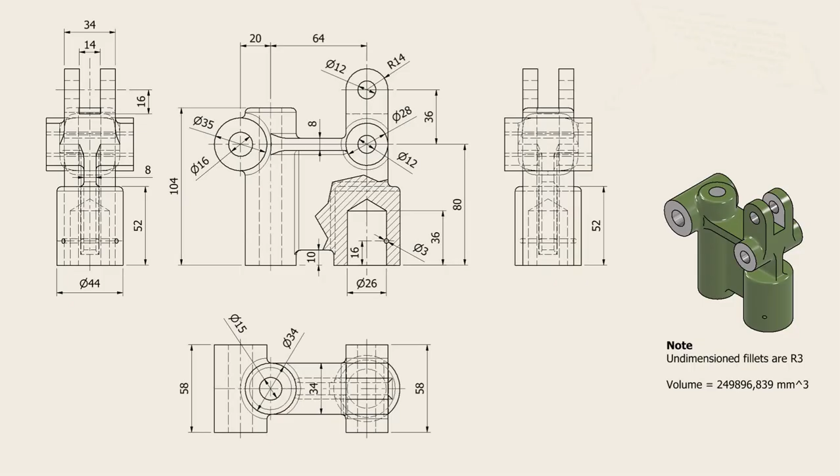Hi my friends, today we model this part with the name connecting piece. It is not so complicated. The drawing is here.

We start by creating these two circles, one of diameter 44, this one, and the other with diameter 34, at a distance of 64. One is 52 tall and the other is 104. Let's do this.

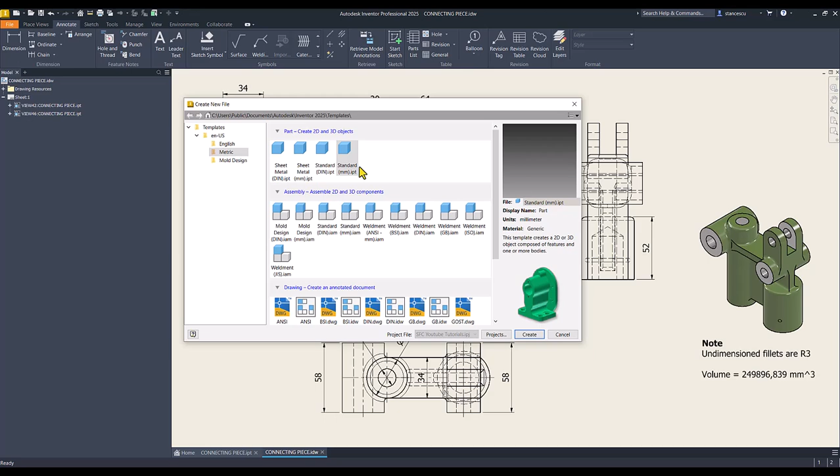New standard millimeters IPT, new sketch, this plane. I rotate the axis to have X to the right. Circle 44, circle 34 on the same horizontal, at a distance of 64.

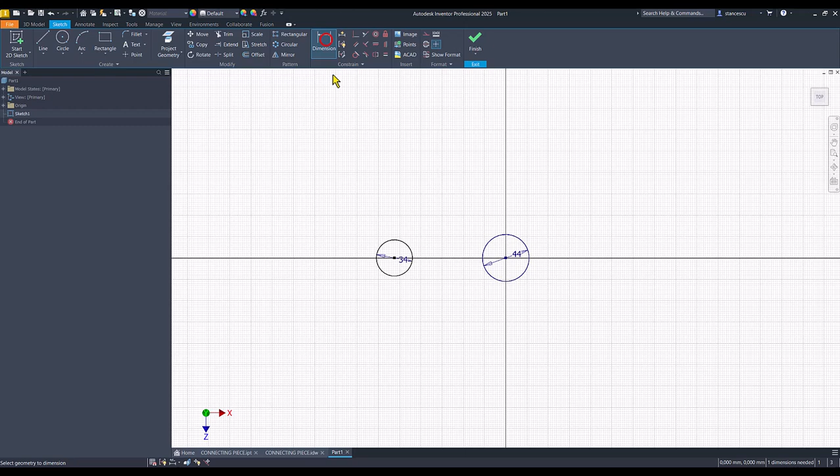Finish sketch, extrude 52 plus 104. Okay.

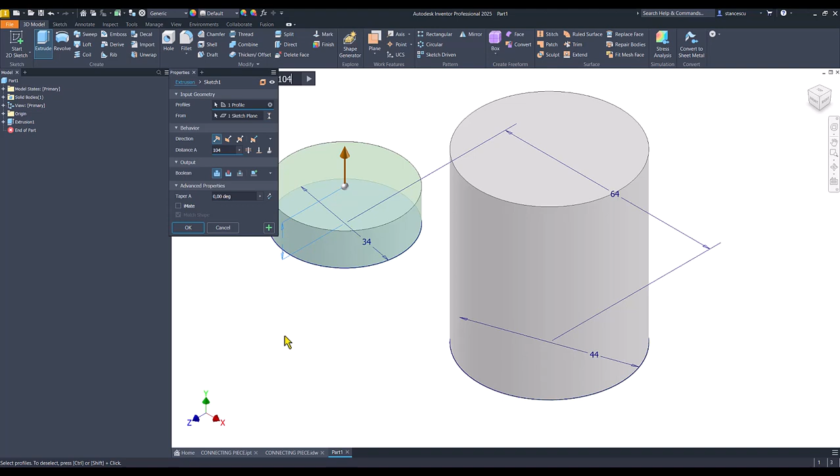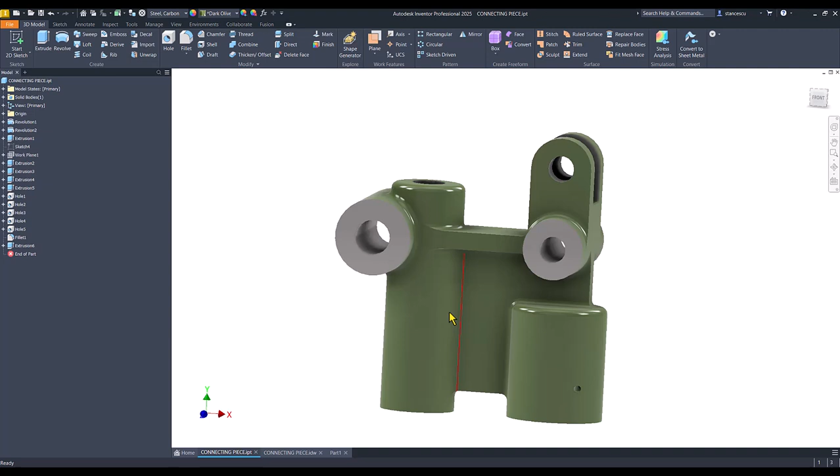Now I want to create this rib, which goes to here and it's tangent to this cylinder. So I create it to this level, mid of this other rib. More specific dimensions are 80. Note this 10, and the distance from this face, which is 14 millimeters from the center point. This is the center point, and I have to place this at 14 and the other on the axis of this cylinder. Let's do this.

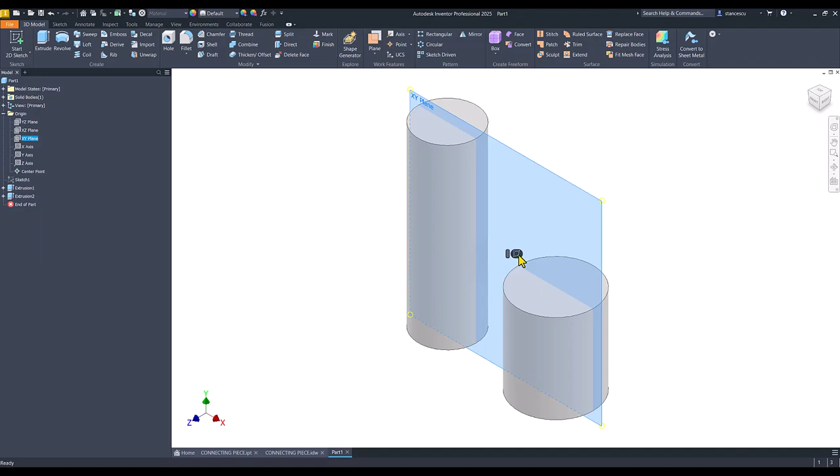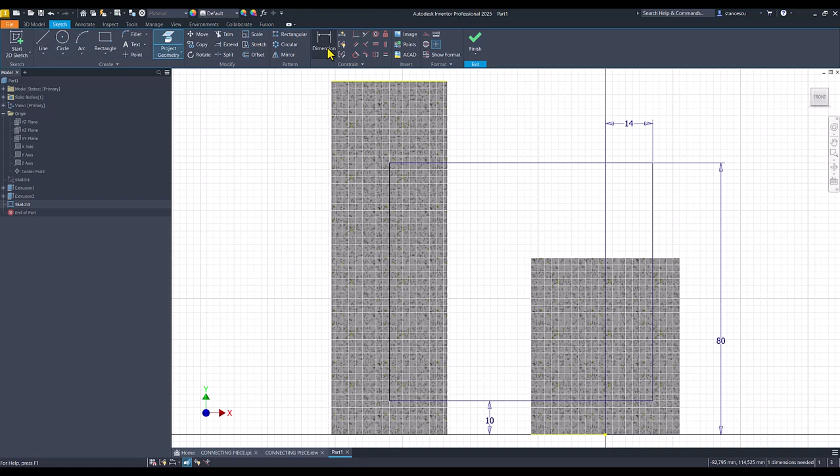We use the plane XY for a new sketch. F7, rectangle, somehow this is placed at 80 millimeters from the bottom. This is 14. This is 10, and I project this face to have the possibility to make coincident these two, line and point.

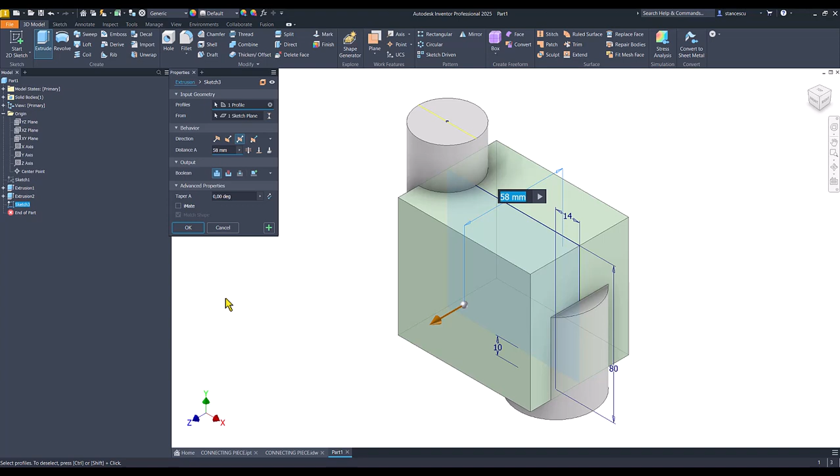Fully constrained sketch. Let me see what is the thickness. Thickness is 8. I apply extrude, symmetrical, 8. Okay.

Now there is another rib, and I start with it from here, from this axis to the left. Dimensions 8 on 34.

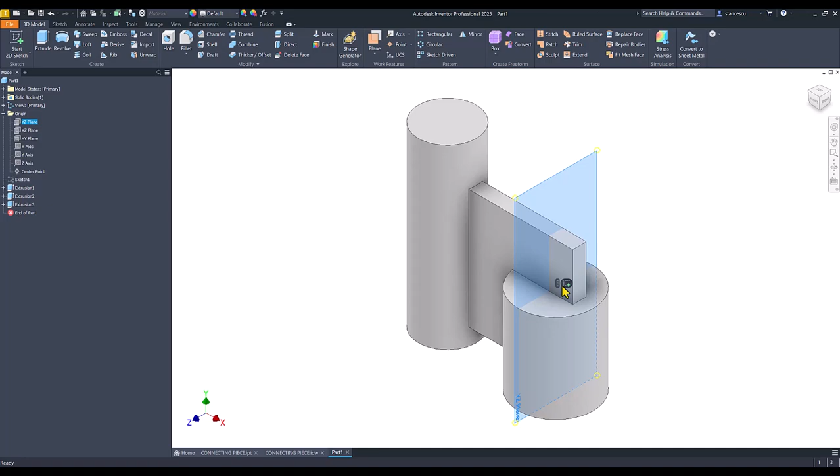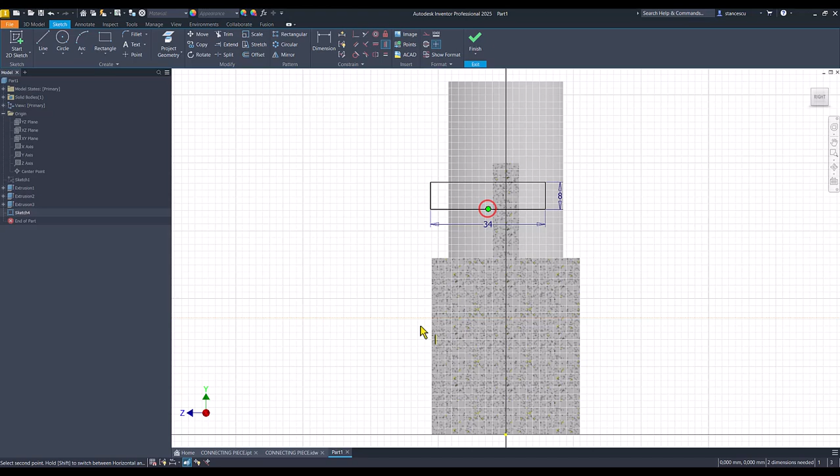I use this plane and a rectangle of 8 tab 34. F7, I place the midpoint of this side on the same vertical, Control Z, on the same horizontal with the center point.

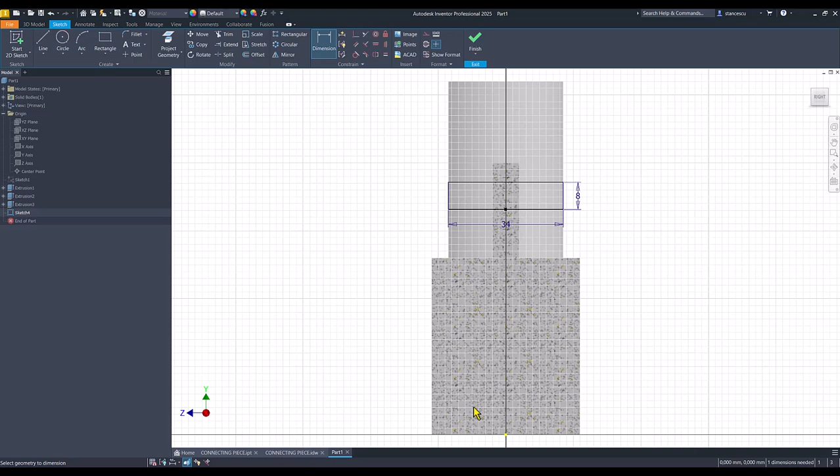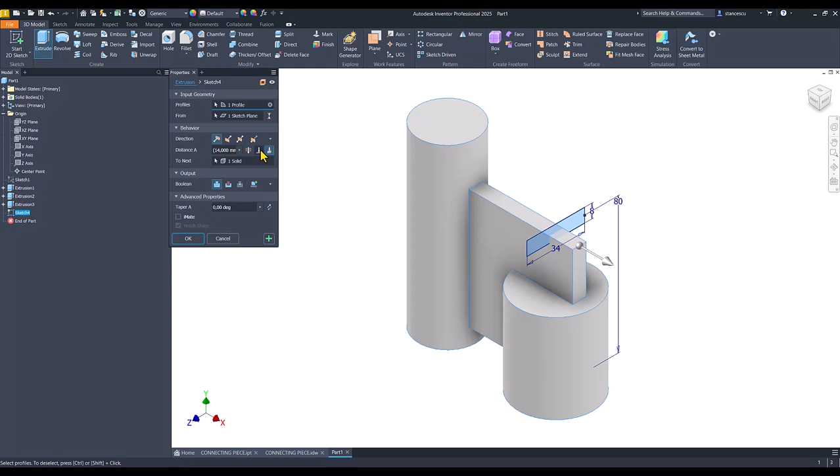Placed at a distance of 80 here, 80. Finish sketch, extrude to the part, to the face, to this face. Okay.

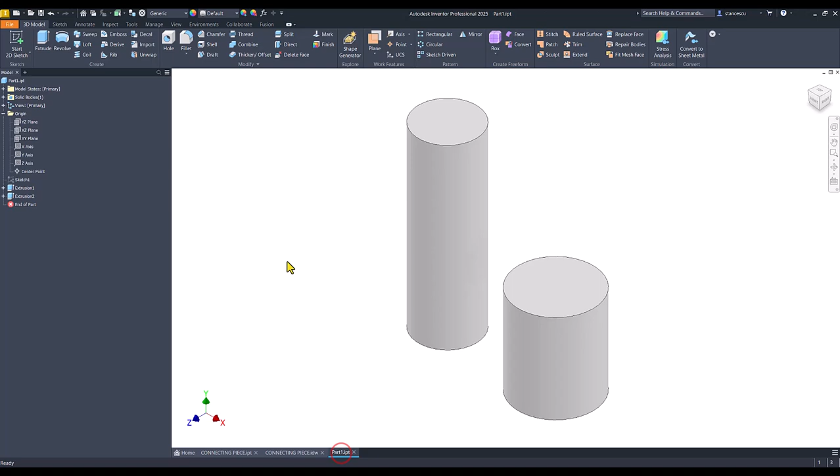We continue with these other two cylinders, diameter of 34 and 28, distance of 64 plus 20, on vertical 80, and this is the axis with the center point, which is here. The two cylinders are the same length. Let's do this. We use this plane XY,

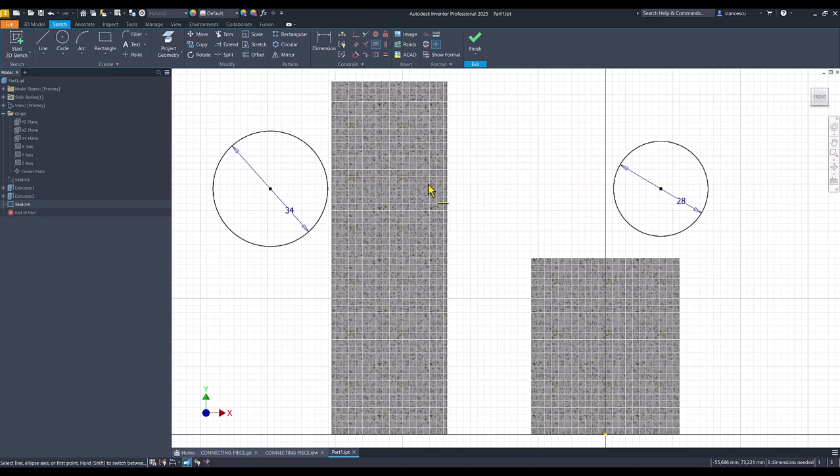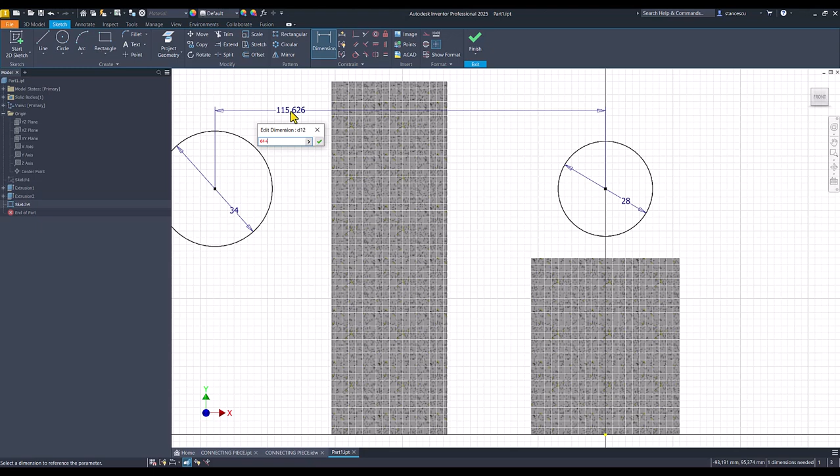F7, circle of 28, another circle of 34. They are placed on the same horizontal, and one of them is centered on the center point, and the other is placed at a distance of 64 plus 20, 64 plus 20. The distance on vertical is 80.

Finish sketch, extrude, 1, 2, on 58. Okay.

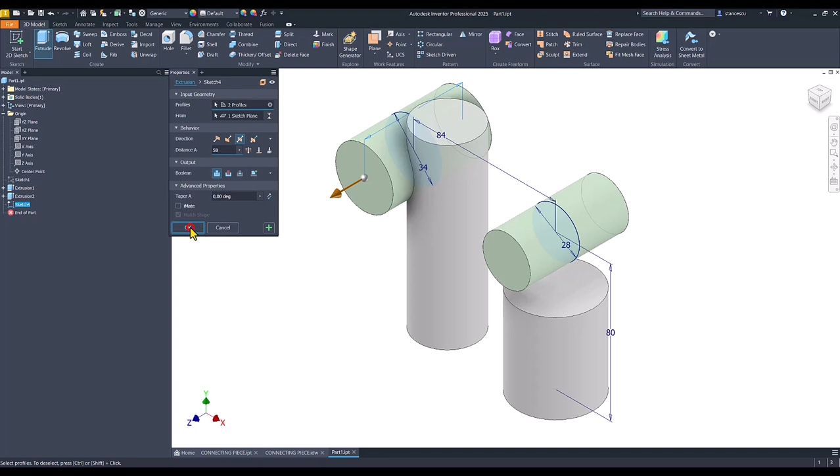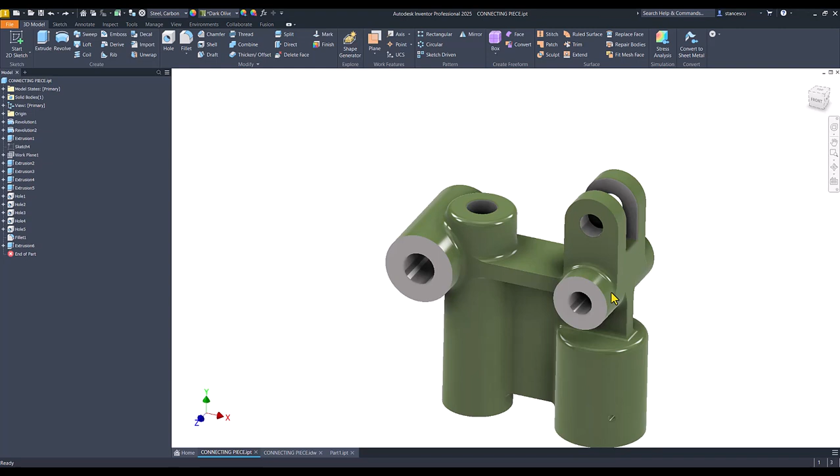We continue with this rib, this one, or this one, you see, this. We start from the mid of this face and ending to this cylinder. Dimensions are 34 on 8, placed on 80 millimeters from the bottom with the mid axis.

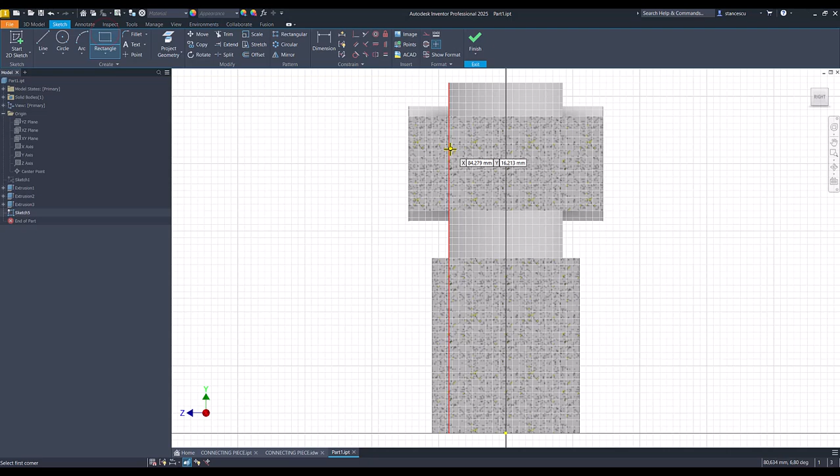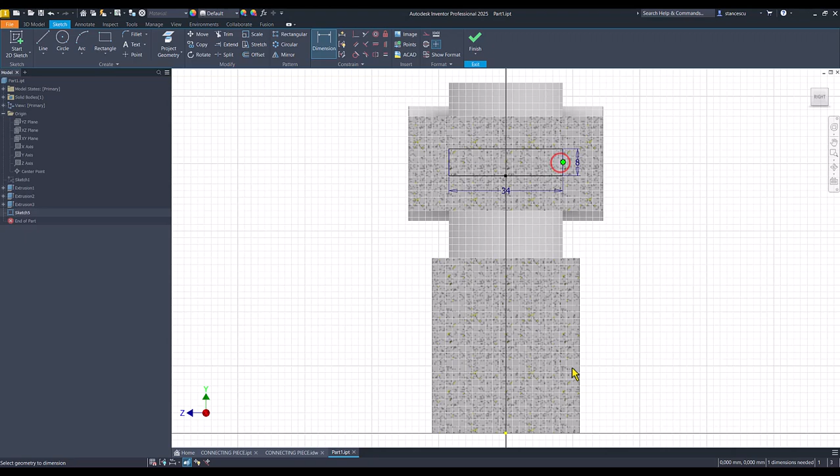Okay, the plane is this, F7, rectangle, 8 tab 34, then I place it on the same horizontal because this is vertical between these two points, and the distance of 80 from the bottom to here.

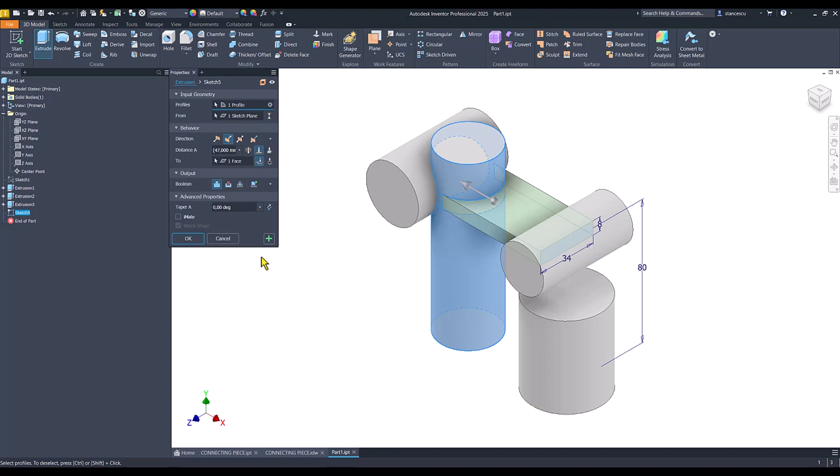80. Finish sketch, extrude to the other direction and ending to this cylinder. Okay.

The other rib is this one, and it connects the two vertical cylinders. Dimensions 10 millimeters here to 80 up, and it ends here tangent with this cylinder. Good.

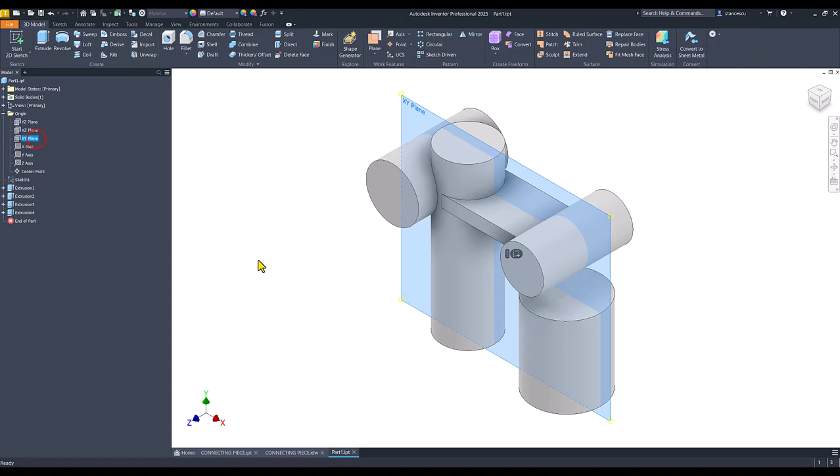XY plane, F7, rectangle, to this face and tangent to that circle.

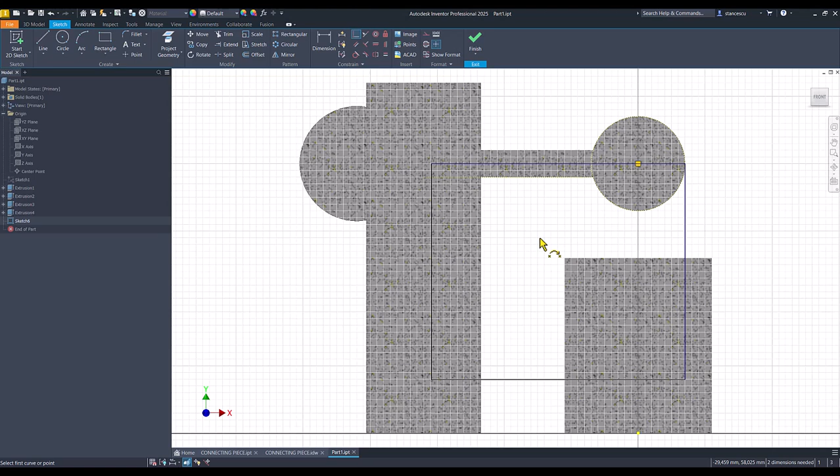I project this face, I project this cylinder, but I make them construction, and I apply tangent here, collinear here, now I place this line on this point, and this distance is 10.

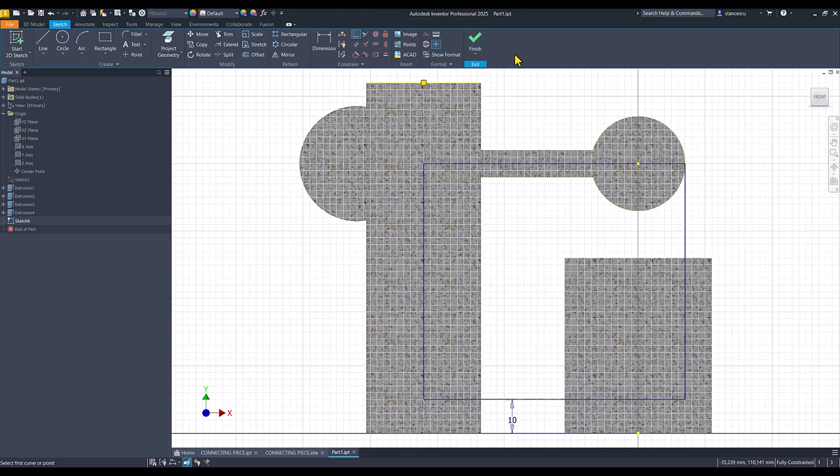I project this line to make coincident this line with this center. Yes, fully constrained sketch. Extrude, symmetrical 8.

Okay, you see here the thickness. Very good.

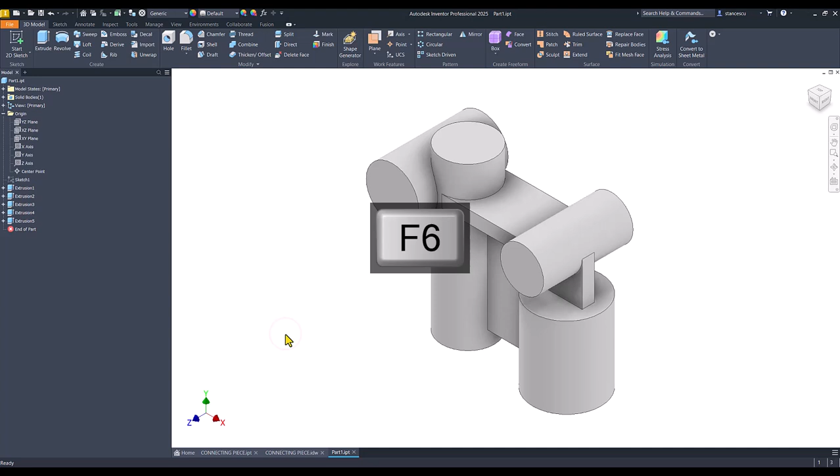Now we focus on this feature. Dimensions are here, 36, radius 14, starting from this 80. Let's do this.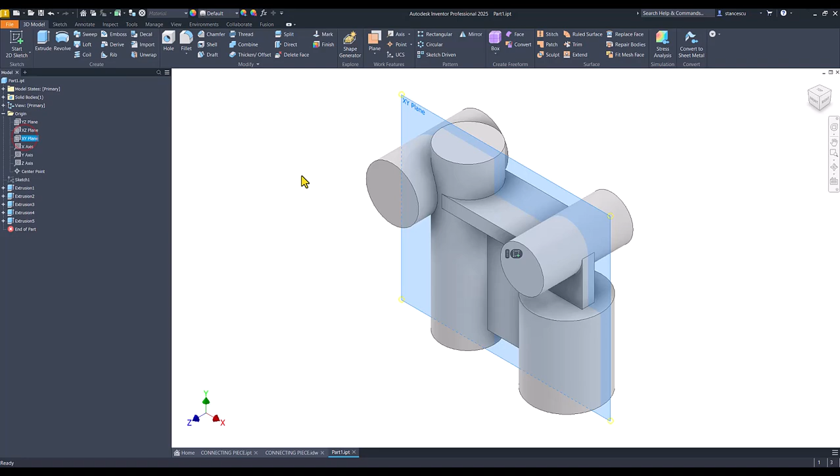The plane is XY, F7. We project this circle, but I select construction,

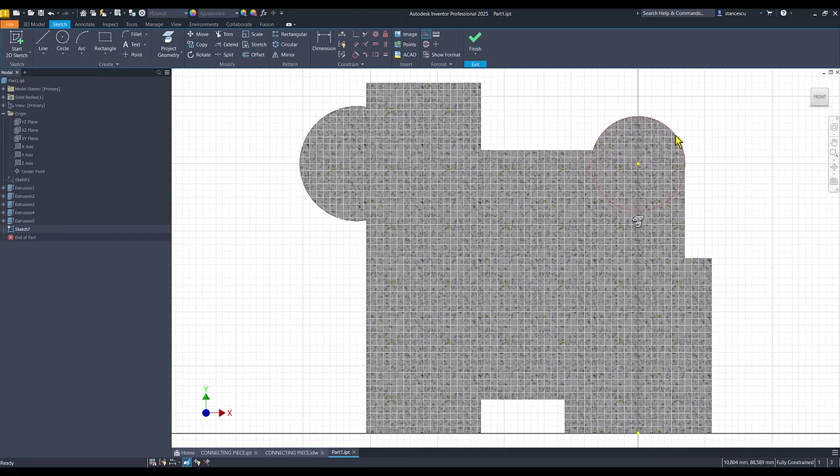then I draw a line from this end point to this horizontal end point, but this is not okay. No problem.

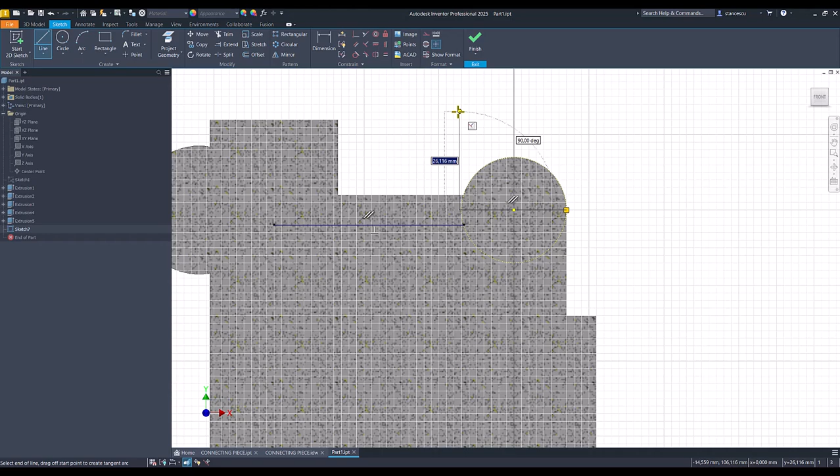I go here, click, press the left button and go here, close. Now I place this end point on the circle and I apply tangent here.

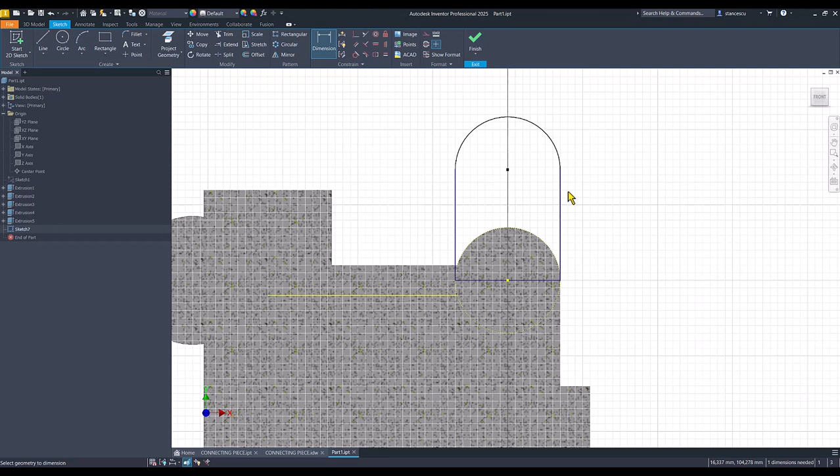Radius is already 14 because this circle is 28. I can accept or I don't accept. I don't accept. But the other dimension is important and necessary, 36.

Finish sketch. Now you see here the dimension 34, then a cut of 14 on 16. Extrude, symmetrical 34. Okay.

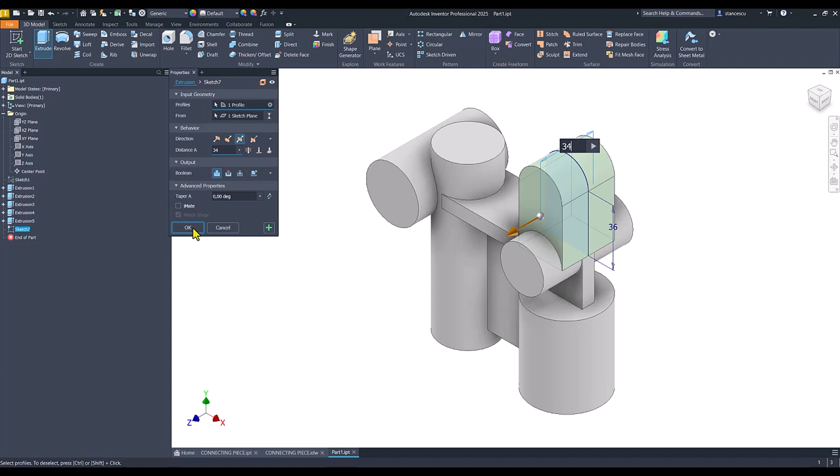Then I use the same plane, F7. I draw a line between these two, which has the dimension of 16 from the center, but this center is not projected. I project a circle, I apply dimension of 16.

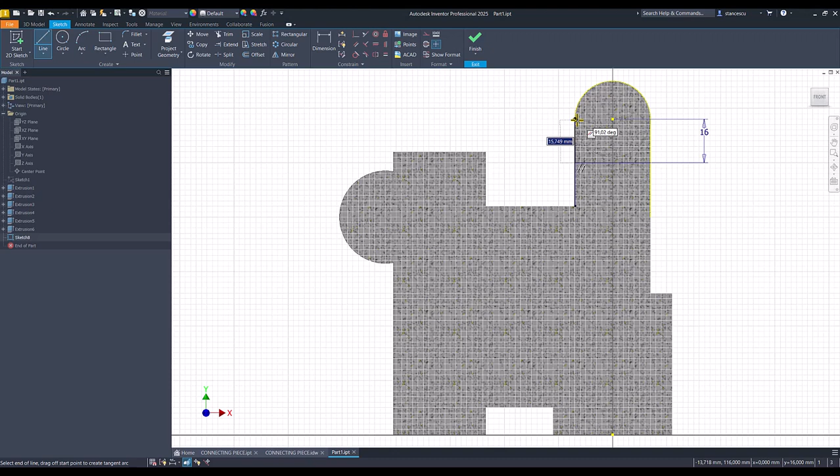And I draw two lines, one, restart, two, and now I apply extrude, symmetrical, with cut on 14. Okay.

Next, the holes. There are many holes. This is 16 and this is 12, as well as this one, 12, and they are through.

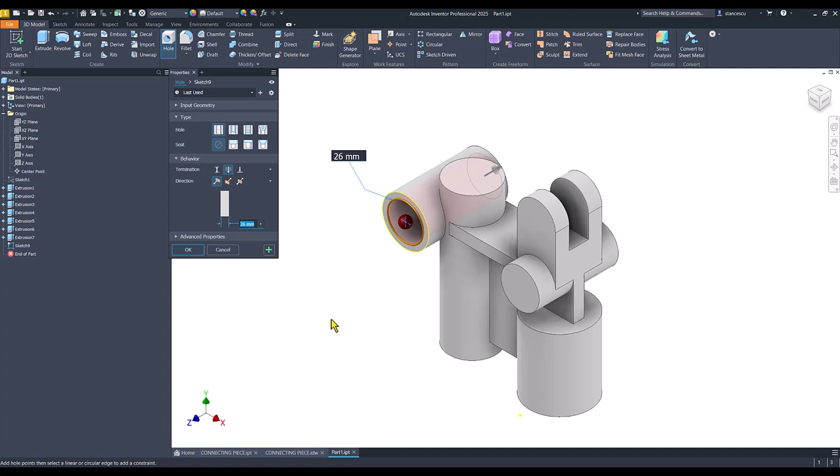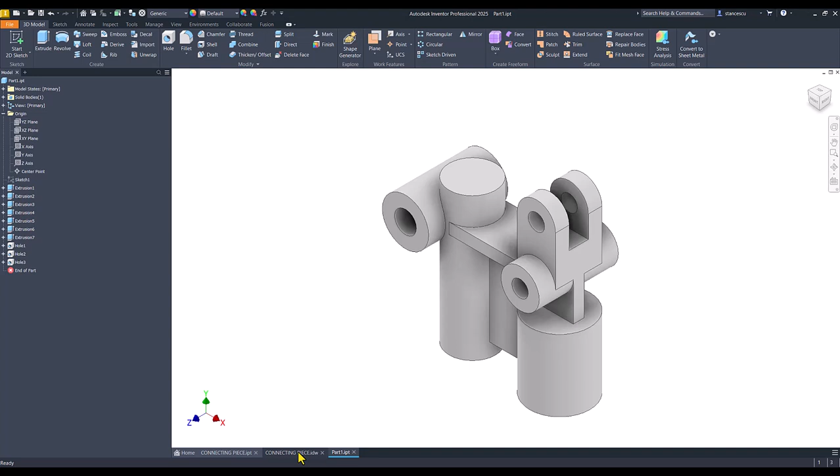Let's start with this hole, face, center, all the way through, and the dimension is 16, plus this face, this center, but the dimension is 12, plus this face, this center, and the dimension is also 12. Okay. Other through hole is this one with diameter of 15.

Hole, face, center, 15. Okay.

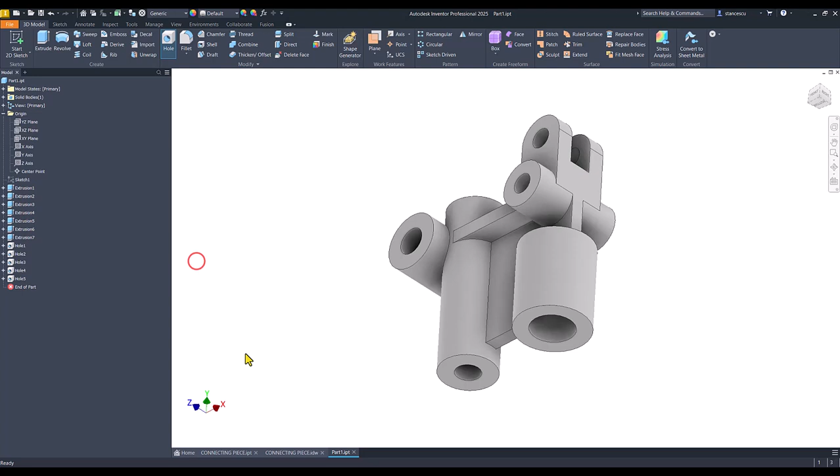The other one is this, 26 on a depth of 36. Hole, with end, from face and from center, of 26, on a depth of 36. Okay, you see that hole.

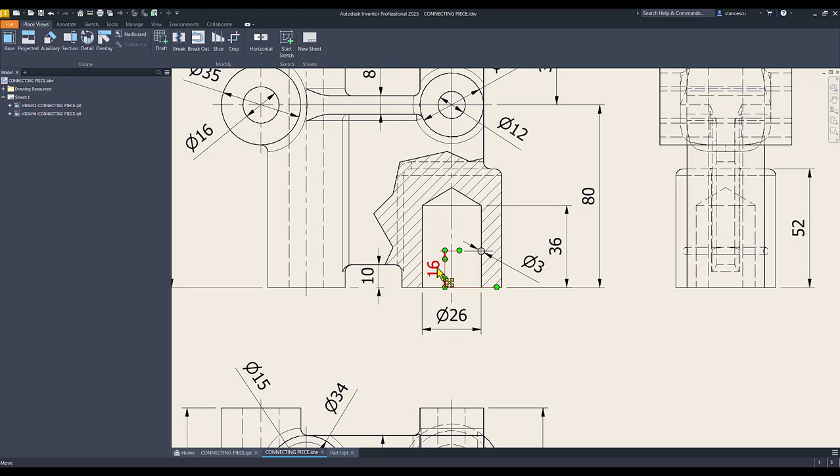A special hole is this one, which is also through, but not symmetrical. It is placed on this generator and at a distance of 16 with diameter 3.

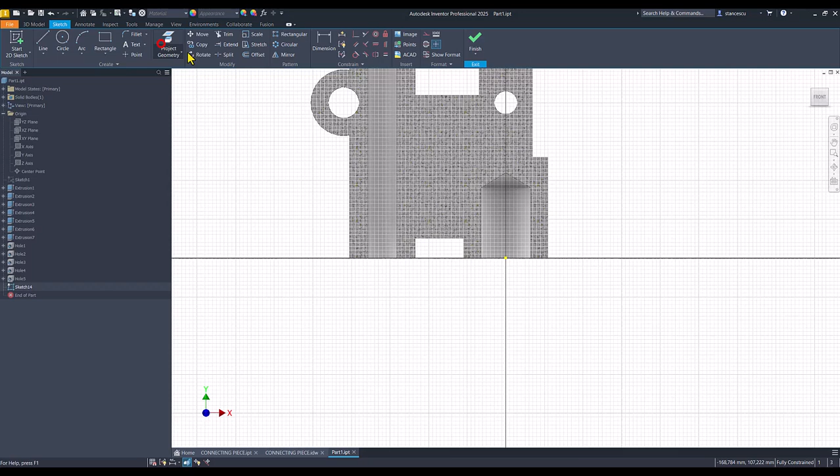Let's do this. The plane is XY, F7, project the generator, place a circle on that generator with diameter of 3, and a distance from the center point to here of 16.

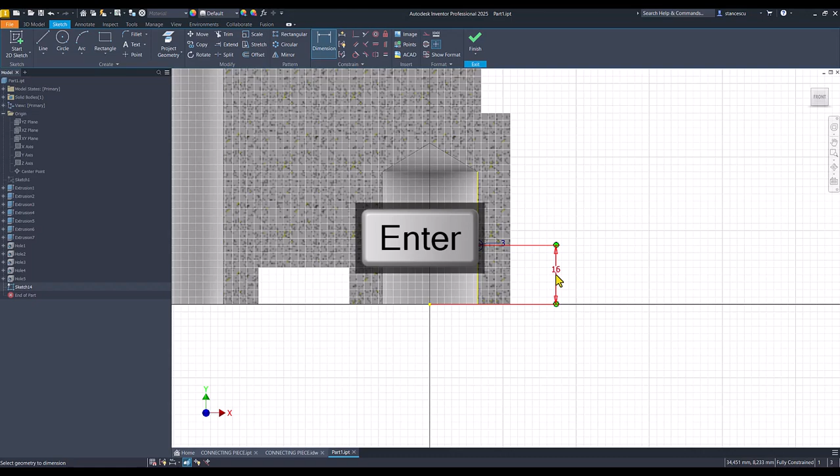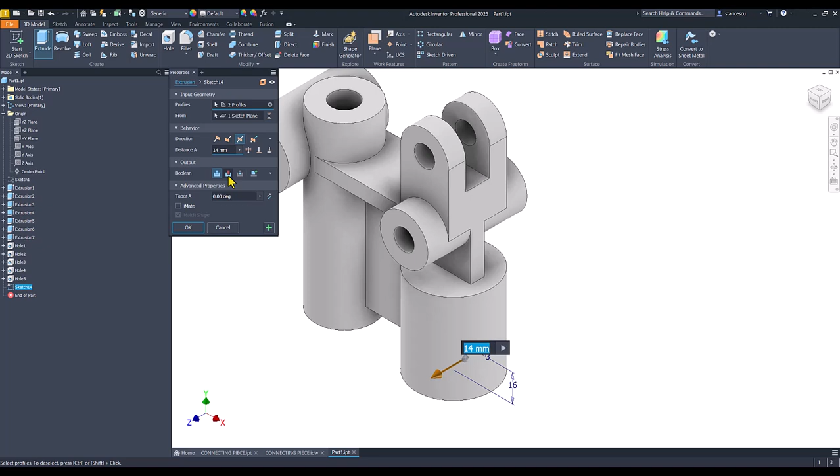Finish sketch, extrude, select profiles. Inventor waits for us to select profile. I select this profile with cut, symmetrical all the way through the part. Yes. Okay.

Now we see here undimensioned fillets, radius 3. There are a lot of fillets. I hope to apply all over. This is 3, and the other, all of them, is also 3.

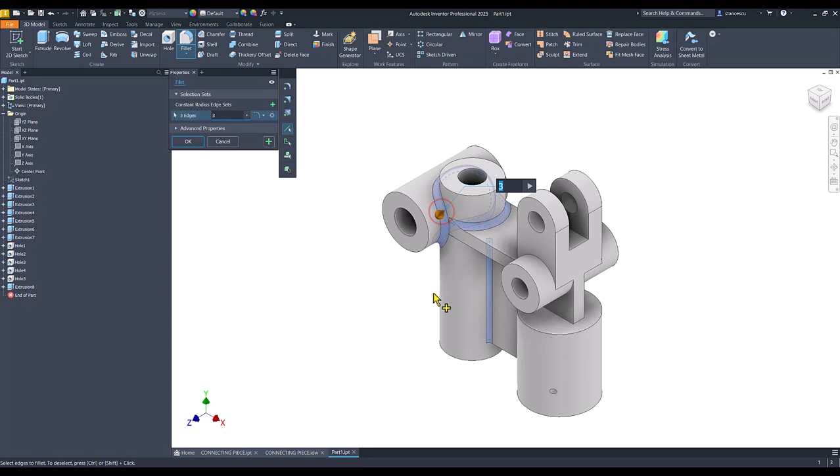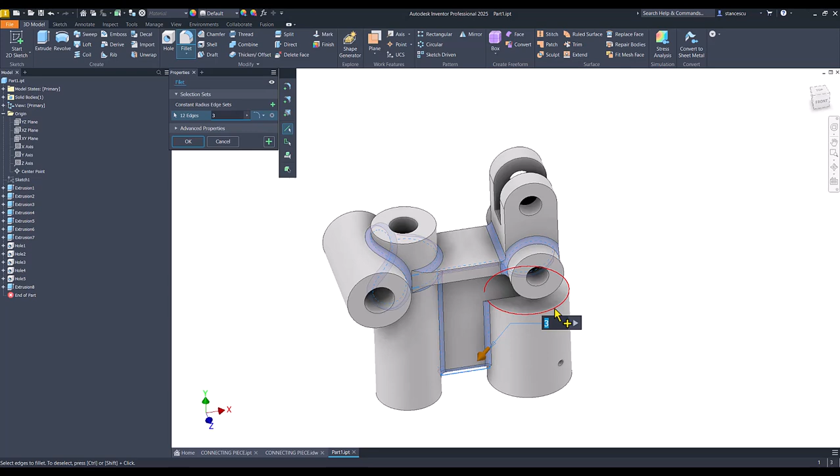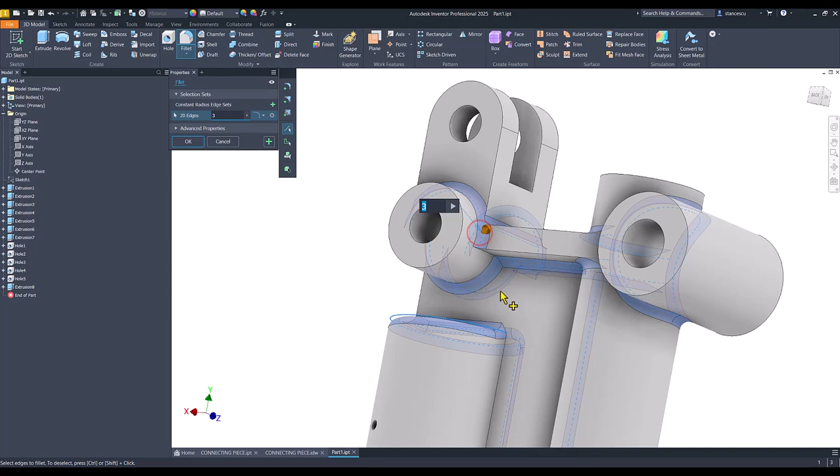All these edges are filleted, even this too. Even this, also this, and we go on the other side to apply many fillets. I hope to apply all of them. We'll see when we calculate the volume.

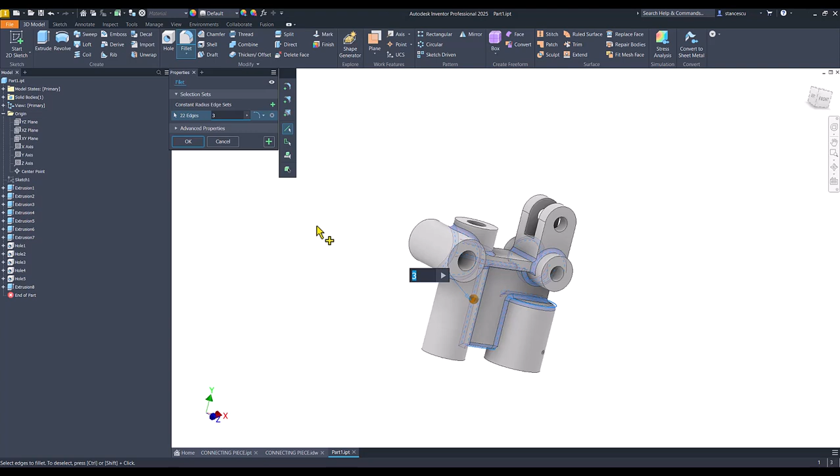Okay, I missed this edge. You see it is also filleted. Double click here, I add another edge. I don't create a new fillet feature. I modify the existing ones.

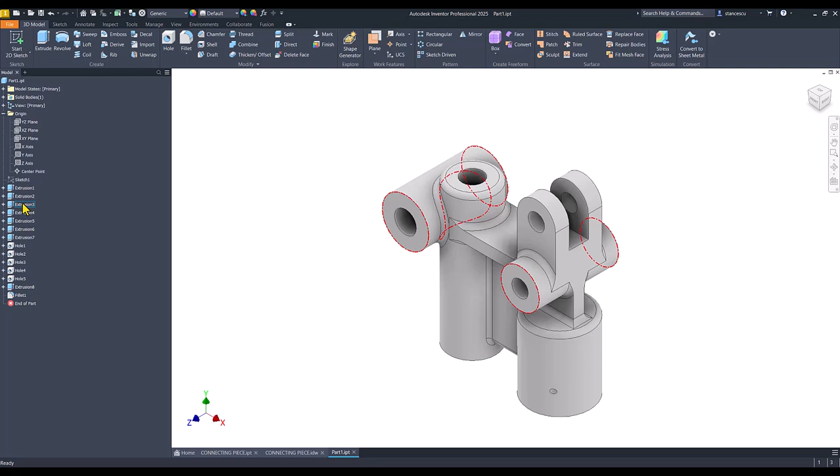Now I feel that this is smaller. Let me see. What is that? This is. Double click. This is 35, my friends. 35, not 34. Double click. 35. Good. I hope I didn't miss anything.

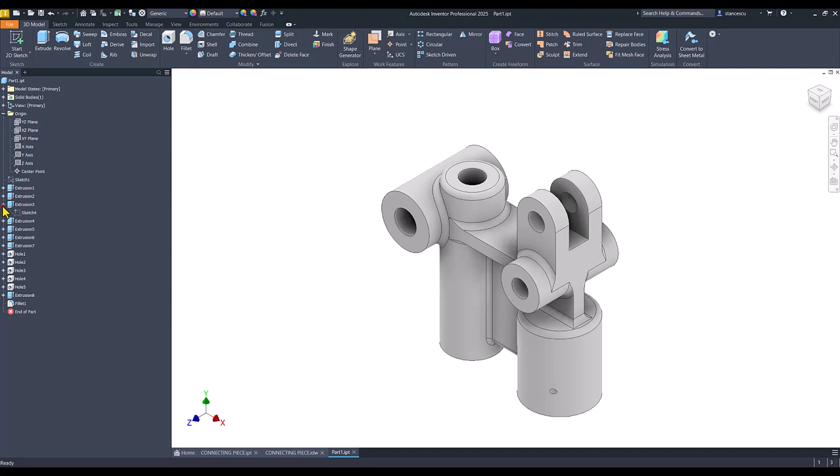Let's see by checking the volume. Properties, physical, update, copy, close, drawing, double click, paste.

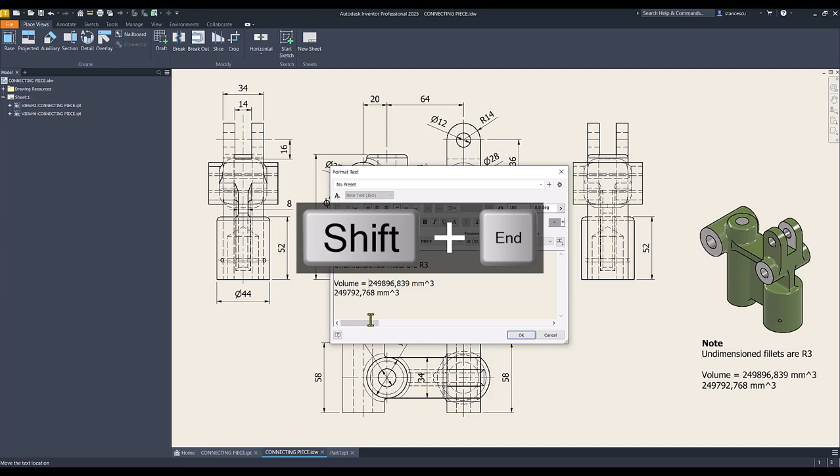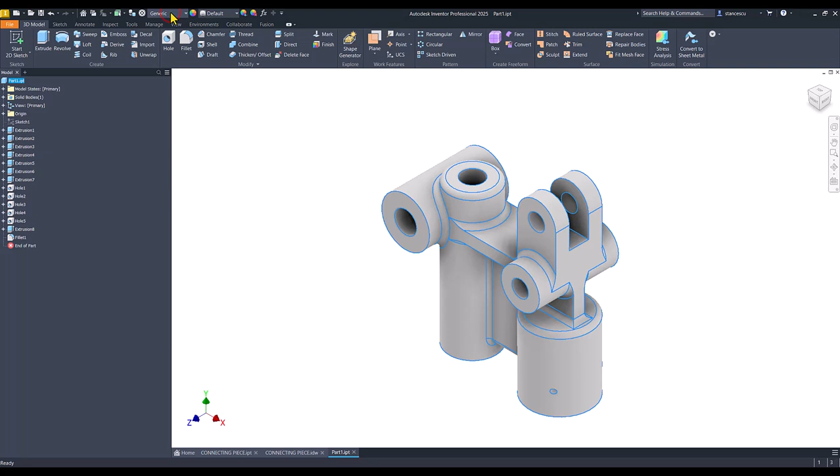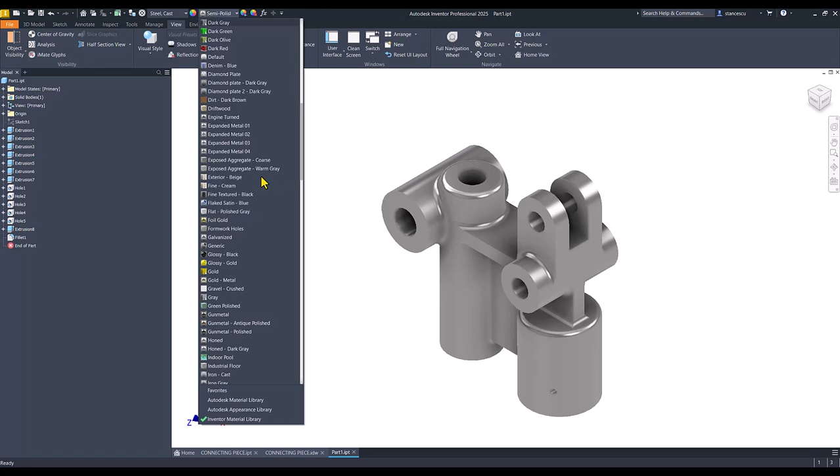Material is steel cast. Edges are hidden, and the aspect, general aspect, is dark olive.

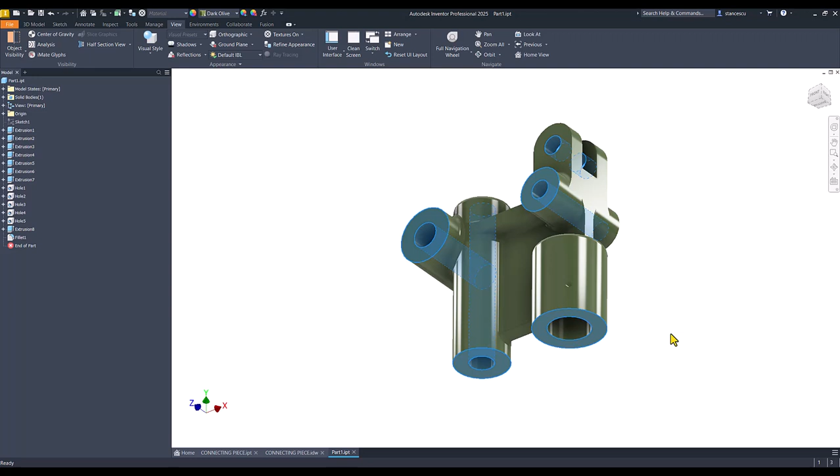I apply some machining faces. You can add any other ones. You see, I press the shift button on the keyboard to select other and other faces. I press the shift.

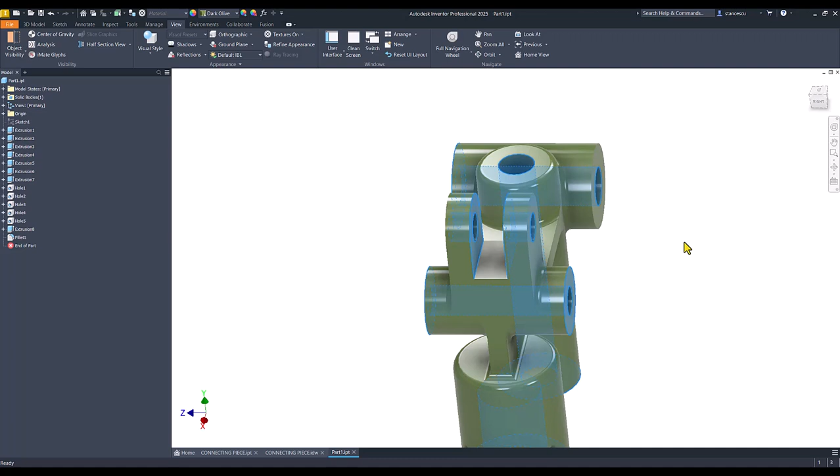This is not in my original, and I apply steel polished to all of them.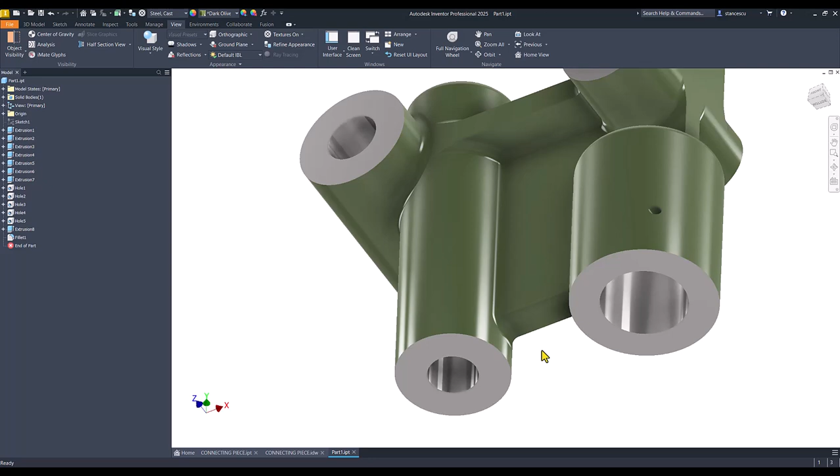Let's compare this with this. Here is something. This is a face with only one fillet. Maybe this is the problem. I double click the fillet and I add also this.

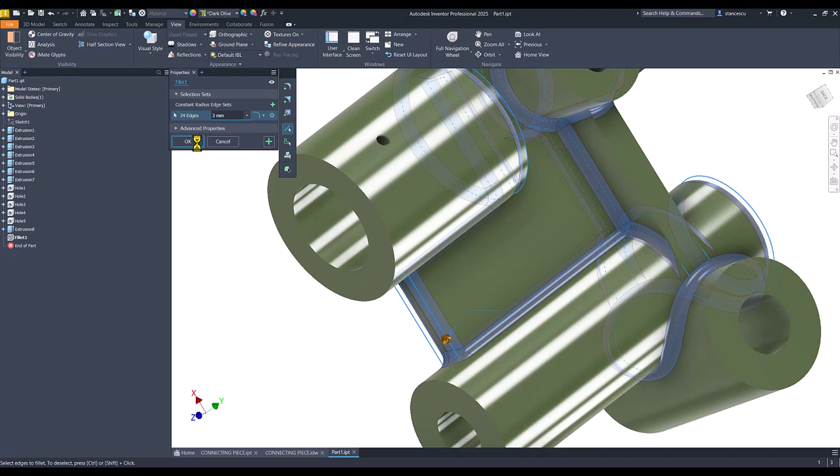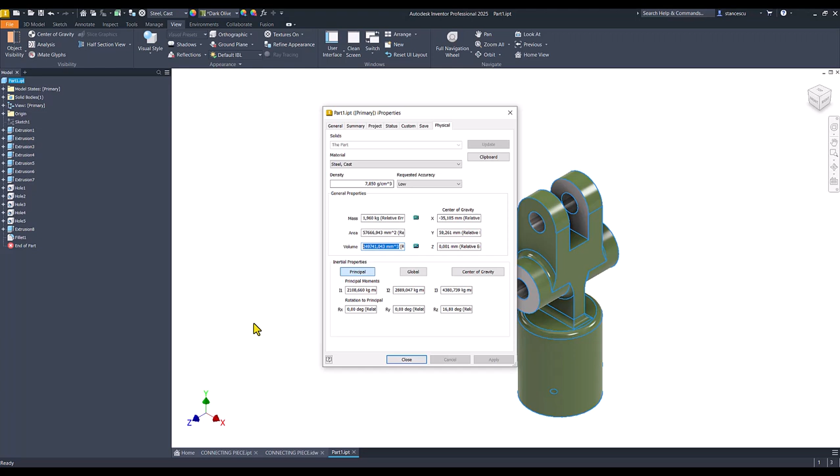Now I hope the volume is the same as in the previous. Let's see what happens? Nothing happens. Properties, physical. You see, we don't have a value because we modify the part. Update, copy, close, and paste the new value.

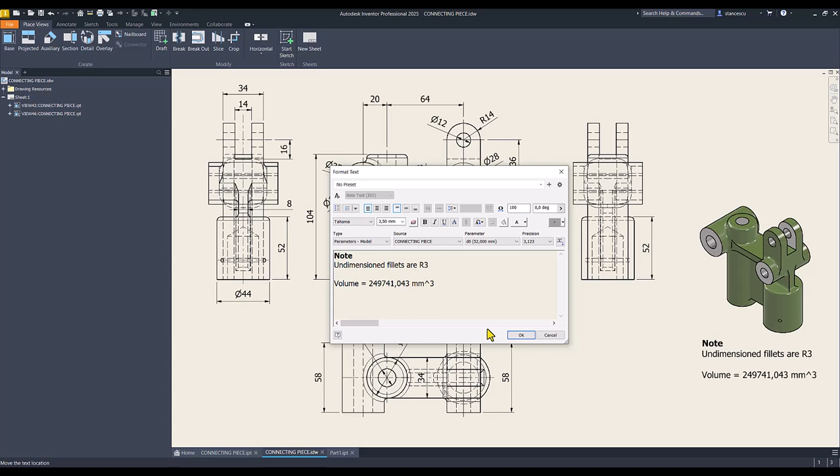I don't know if this is the other, but I know that this is our result. Okay, that's all for today. Thanks for watching. Bye bye.